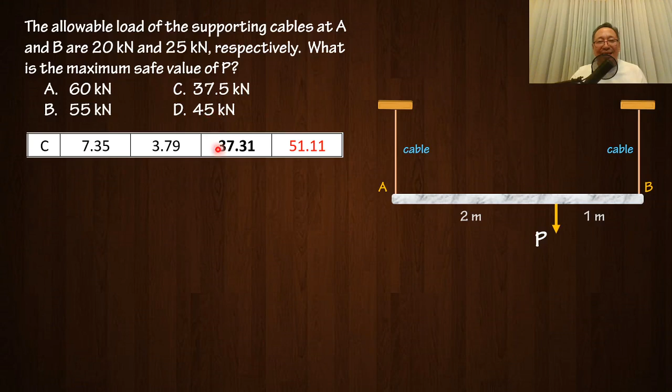The correct answer is letter C. But most students, every time binibigay namin itong mga ganitong klaseng problem, talagang maraming pipili ng letter D. Okay, bakit? What is the common mistake and ano yung proper way to attack this problem? So, of course, ito yung basics dito. The tension of the cable at A, tawagin nating PA, and the force of the cable at B, tawagin nating PB. Okay, so ito yung common mistake.

The common mistake is, isiset ng students yung PA equal to 20. So, PA equals 20. And then, PB equals 25. Then, they will do summation of forces vertical equals 0. And you will have PA plus PB minus P equals 0. So, that is 20 plus 25 minus P equals 0. And they will get P equals 45 kilonewtons. And, unfortunately for them, meron 45 kilonewtons sa choice, kaya pipiliin na nila yung 45.

Well, I'm not saying that is wrong. There is a chance na tama yan. But it will not be enough. Take note, there are two unknowns here. So you just did one equation. Take note that if there are two unknowns, there must be two equations of equilibrium. And this is the rule of thumb: in any structure, the condition of equilibrium and compatibility of stress must be satisfied. Kung indeterminate yan, compatibility of strain.

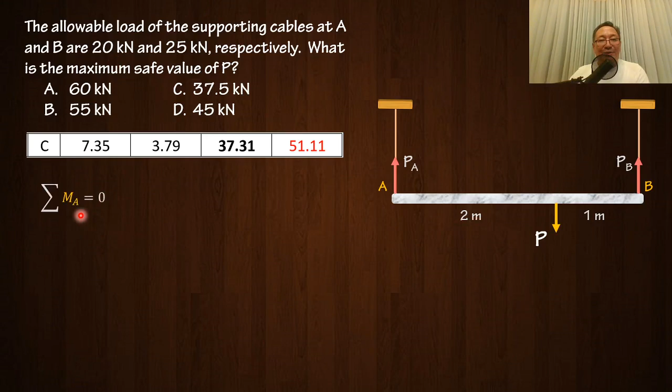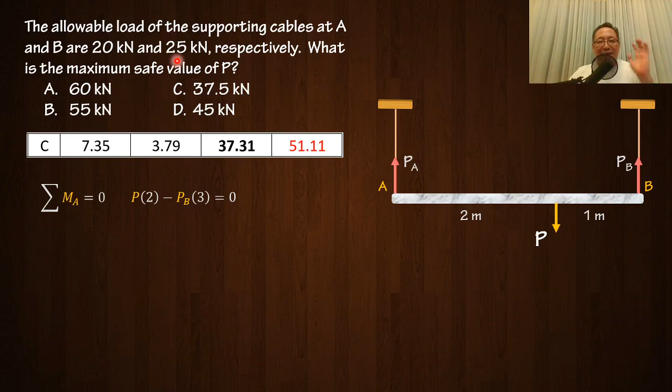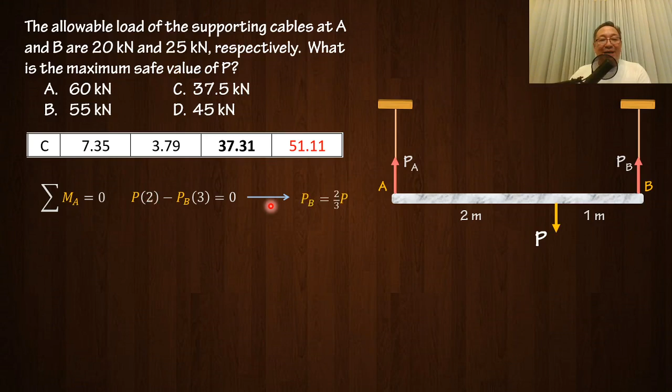Summation of moment about A equals 0, you will have P times 2 minus PB times 3 equals 0. Huwag niyo muna i-substitute yung 25. I will make this na maklaro talaga pag-explain. So, let it be like that muna. So, from that equation, makukuha natin yung PB equals, transpose ko lang yung P sa kabila, sorry, not 3 halves, 2/3 of P.

Alright. Then, I can now use summation of forces vertical 0. Pwede. Pero para madali, moment na lang din. Summation of moment about B equals 0. That could replace the summation vertical. Mas madali kasi ito, kasi if I do that, I can immediately have my P in terms of PA or vice versa. So, what we have there? P times 1 minus PA times 3 equals 0.

Huwag nyo nang alalahanin bakit naging baliktad yung sign ko. Ang importante dyan, pag sinabi mong summation of moment, nahiwalay mo yung clockwise at saka counterclockwise moment. Kasi yung iba nagtatanong, sir, ba't positive yung P times 1 mo, counterclockwise man yan? Kung nasosolve ka lang ng reaction, it doesn't matter. Alright. Now, from that equation, makukuha natin yung PA in terms of P and that is equal to 1/3 of P. Ito talaga yung tama na solusyon.

Now, anong gagawin natin? PB equals 2/3 of P. And according to the problem, ang allowable force of B is 25 kilonewtons. So dapat hindi lalagpas siya ng 25 kilonewtons. So 2/3 of P must not exceed 25 kilonewtons. Solving for P, P must not exceed 3/2 of 25. So that will be 37.5. So that's one, based doon sa PB.

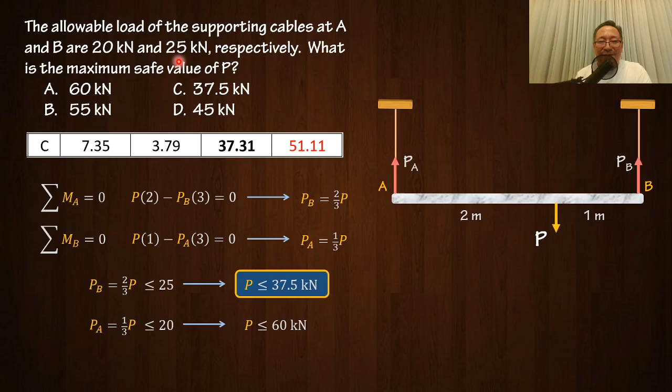Tingnan nyo to. Sige. Try nyo muna and then pause nyo yung video and then try nyo pag-solve. Wala namang mawawala. No? Pause nyo muna. Okay. Sige. The allowable tensile force in each of the supporting cables is 5.65. Ang allowable, allowable sinabi. Hindi sinabi na yung force sa kada cable is 5.65. Ang allowable. What is the largest safe value of W?

Okay, so ito yung ating principle muna. By the way, ito pala yung statistics dyan. Most students here chose letter A. The correct answer is letter D. Only 14% chose letter D. But 77% chose letter A without a doubt. Bakit? Okay, tingnan natin. The tension at this cable, tawagin natin TB. The tension on the other cable, tawagin natin siyang TC.

So, ito yung common mistake. Just like what happened in the first problem, since binigay dito 5.65, they will set TB to 5.65 and the TC to 5.65. Now, isasubstitute nila 5.65, 5.65, and then summation of forces vertical 0 agad. Patay kang bata ka. So, summation of forces vertical, TB sin 50 plus TC sin 30 minus W equals 0. Yung TB tsaka TC mo, the same, 5.65. And unfortunately for you, may lumabas, 7.15, kaya pinili agad ang letter A.

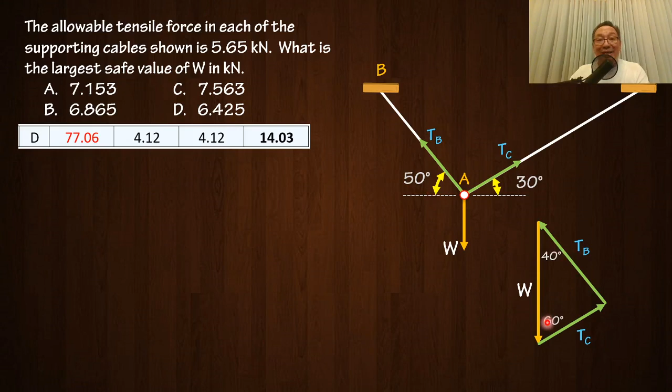The angle of TC to the horizontal is 30, so this is 60 degrees. TB, the angle from the horizontal is 50, so from the vertical should be 40 degrees. 40 plus 60 is 100, so this angle must be 80 degrees. So by sine law, ma-express natin yung TB at TC in terms of W, the same as in the first problem. TC over sine 40 equals TB over sine 60 equals W over sine 80 degrees. This gives TC equals W over sine 80 times sine of 40 degrees, or TC equals 0.653 W.

So, equating this one to this, TB equals this, so that will be W over sine 80 times sine of 60 degrees. Then, we will have TB equals sine 60 divided by sine 80 is 0.879 W. Okay. So, meron na akong TB and TC in terms of W.

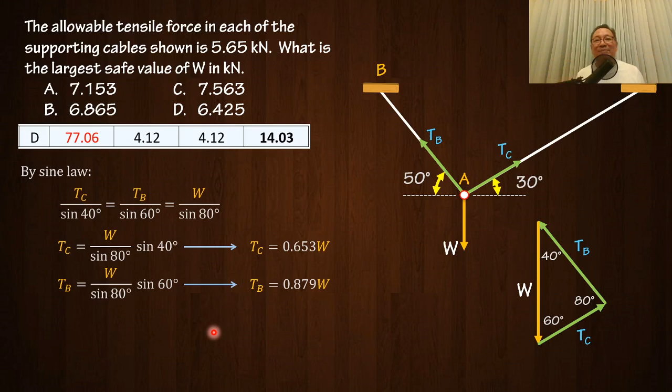Na? Okay. Sige. So what will we do? So ngayon, itong ginawa ko kanina, ito yung TC, 0.653W. So this must not exceed the allowable because that's the criteria, that's the rule of thumb. The computed stress must not exceed the allowable stress. That's the basic. Must not exceed the allowable is 5.65. Then makukuha mo yung W. Sasabihin natin dyan, W based on the strength of TC.

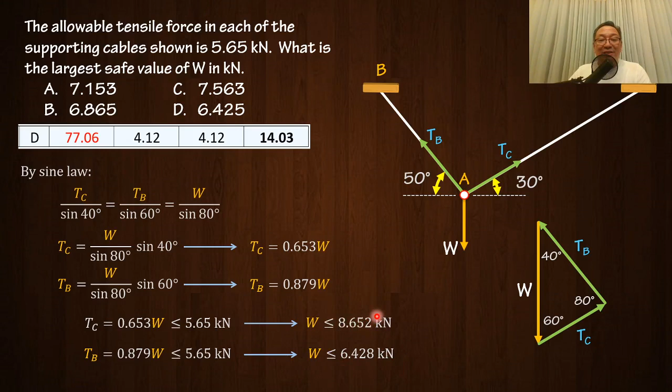Pero you know what? If you use inequality, hindi ka na magtatanong kung what choice should you choose, higher or lower. Gumamit kayo ng inequality. Huwag kayong gumamit ng equal sign. Kasi kung ginamit mo equal sign, malilito yung iba. Ano ba yung pipiliin namin, sir? Higher answer or lower answer? Ganon yung common question. But in my review, I changed it to inequality. Wala nang nagtanong. And that's the advantage of that.

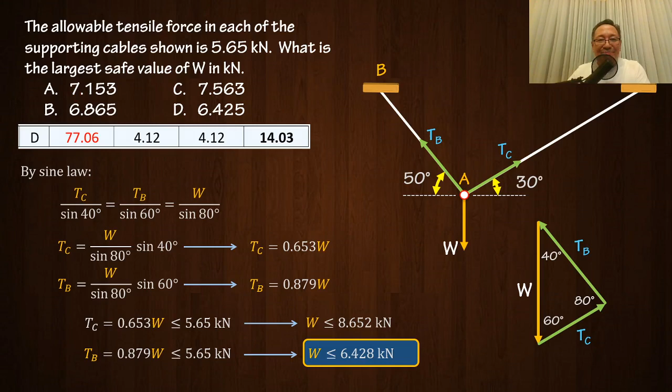Okay, so the answer is 6.425. Most students answered letter A. See? I hope you are getting this. Okay, one more example. Alright, ito strength na talaga to kasi may allowable stress na. Ito, binigay ko na rin to mga last refresher yata yon or review. Nakalimutan ko na. Pero may stats din ako.

In the figure shown, H is 4 meters, ito naman ay 3 meters. The cross-sectional area of the cable is 400 square mm. And the wood strut BC cross-sectional area is 10,500 square mm. The allowable stresses are 75 MPa for the cable and 5 MPa for the wood. Determine the largest W that can be supported safely by the structure.

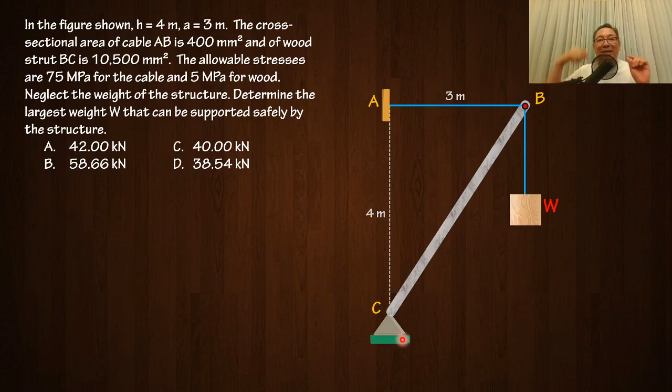Now, take note. Bar BC is a two-force member. Ano ba yung two-force member? Ang two-force member is any member that is loaded at 2 points only, and then walang moment. Notice that if we neglect the weight of the bar, the loads of BC is only at B and at C. And since there is no moment, masasabi natin na yung total reaction at B and the reaction at C is pointing towards each other. And since this is straight, then your BC is axially loaded.

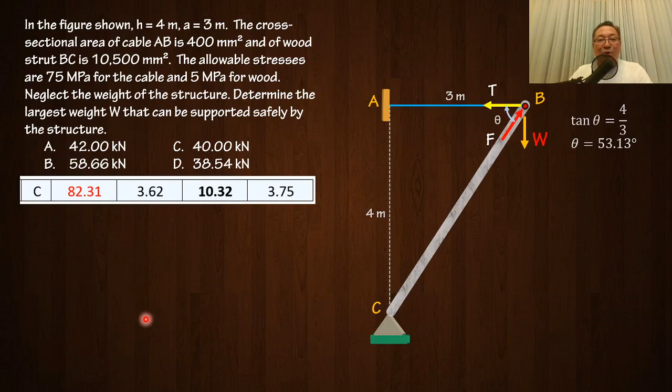Given yung area, given yung allowable stress, makukuha nila yung F. F is, the allowable stress is 5. That is for the wood. 5 MPa times the area is 10,500 square mm. Then F is equal to 52,500 or 52.5 kilonewtons.

Then, kunin natin yung T. Yung T naman, ang area niya is 400 square mm. The allowable stress is 75. Then, yung T is equal to 30 kilonewtons. Okay? And what will happen next? Ito yung gagamitin nila na forces F and T to solve for W, which is very similar to the previous problem. You cannot do that.

So, ang gagawin nila siguro with this, if they have this figure already, they will do summation of forces vertical 0. If they do that, then what can they do? What will you get? So, force going up is F sine theta minus force going down W equals 0. Then, makukuha mo yung W, 42 kilonewtons. And nandyan mo yung 42 kilonewtons, then, yun ang pipiliin mo. O hindi ka na magdududa.

Or maybe, kung mag-moment ka rin sa C, wala naman tong weight, maybe makukuha mo naman yung W based doon sa capacity ng T. Alright? So, that can be the other way around. But, is this correct? Is this correct? So, we have just satisfied the summation of forces vertical. What if we satisfy summation of forces horizontal, if you are thinking that these are the values of F and T?

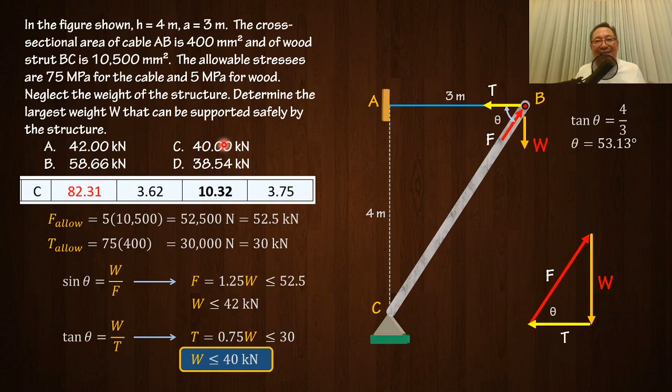So, sino sa dalawa ang susundin mo? Ang masusunod dito ay si 40. The answer is letter C. I hope nakuha niyo yung ibig kong sabihin dito. Everything involves allowable stress. So, the rule of thumb is, pag binigyan ka ng allowable load or allowable stress, huwag mong isipin na yun na yung gagamitin mo na load. It is a criteria for your design to find the safe load. So, gaya dito, ginamit mo agad yan, that would lead to a wrong notion.

Iba yung problem na sinabi na, binigay yung tension dito, ano yung W? Iba yun. Ang binigay dito, allowable. Alright? So, I hope you learned a lot from this video.